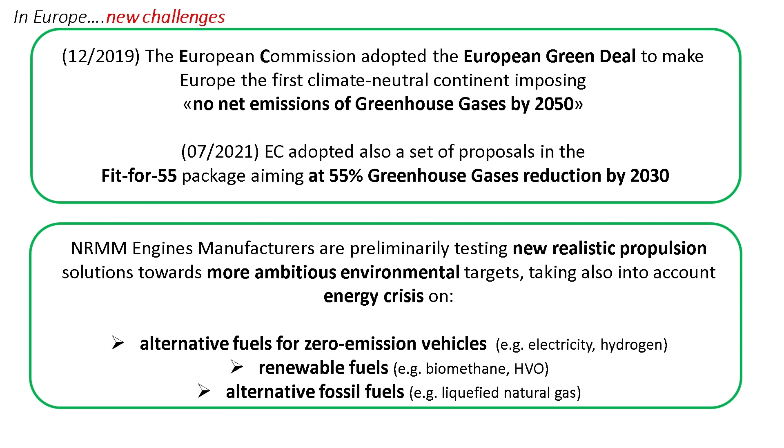I'll now give the floor to Mr. Diego Rotti for FPT, who will talk about the decarbonization process and how it's actually implemented. And then Mr. Mauro Mancuso from Kohler will take the floor and talk about a more sustainable future.

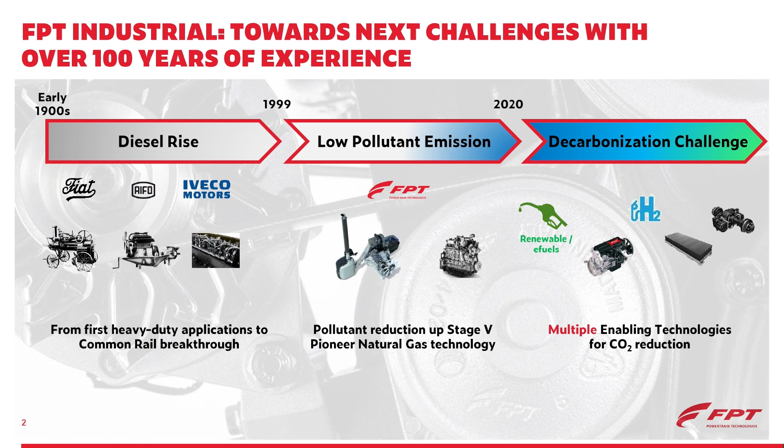Just a few words about our company. We are a company of the Iveco Group, manufacturing propulsion systems for industrial applications, about 500,000 engines a year, and over 130,000 of them are used for agricultural applications, from combines to sprayers and tractors. So we have a good client base that we have to take into account and meet their requirements.

In 100 years of history, we've always worked on the innovation of propulsion systems, motors, and more recently new technologies. This innovation and development has gone through three macro phases. The first one, in the 1900s, was the development of diesel engine technology, improving performance, electronic injection, efficiency, and many technical developments. Over the last 15 to 20 years, end of the past century, beginning of the year 2000,

we were trying to reduce polluting emissions while improving productivity, which is an inevitable requirement. But much of the technological development was aimed at reducing polluting emissions. In fact, the industry was required to gradually introduce regulations that became stricter and stricter in order to reduce pollutants. And at FPT, we introduced some pioneering solutions in terms of efficiency and post-treatment.

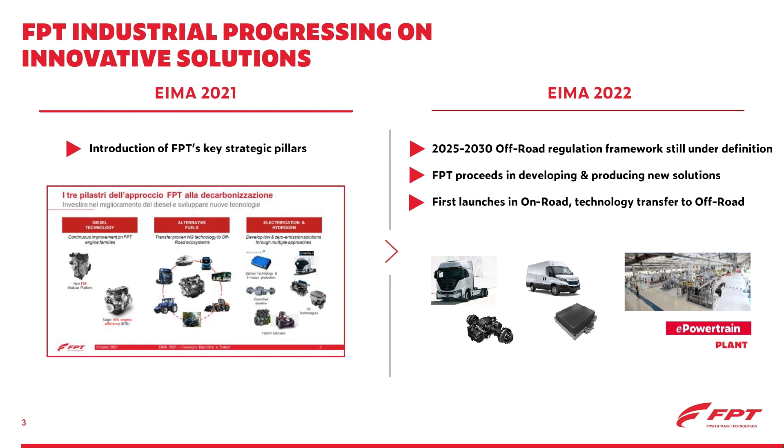We are still operating in a situation where no specific regulations are available yet about CO2 reduction, while in the automotive sector, the EU has already introduced regulations. In the off-road world, there's no legislation available yet. All current developments are aimed at improving products and making them more sustainable, but there's no framework legislation for us to make reference to.

At FPT, we've invested in the development pillars mentioned last year. We worked on prototypes for off-road vehicles and started manufacturing new solutions based on new technologies that will then be used in the off-road vehicle sector. Mid-October in Turin, we opened a new plant that will manufacture high-voltage battery packages and electrified systems.

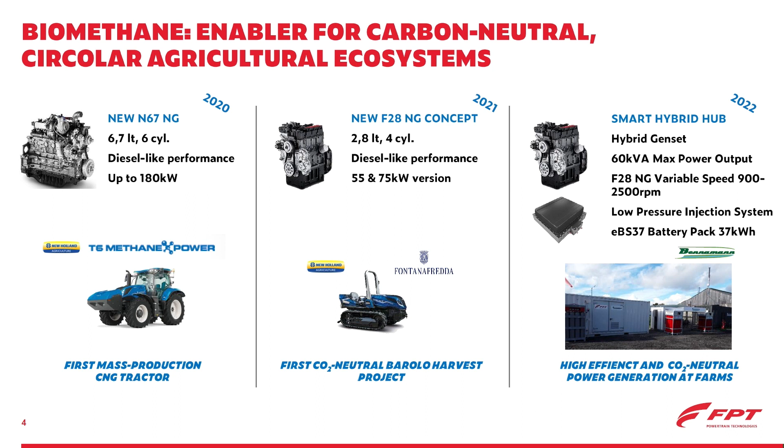The last, but not least, project in time terms is still about the use of biomethane within circular biosystems in agriculture, but for power generation. You can see this electrogen group, which is currently being tested in southern England on a farm with a partner, Bennamann, an English startup developing these biomethane ecosystems all along the whole chain, from management of agricultural waste, purification and conversion into biomethane, and then liquefaction, should it need to be transformed. This group is used to generate electricity to be used on the farm.

The feature is that we use the same engine as the vineyard tractor, gas powered, 2.8 liter. It was combined with a hybrid electrogen group connected to an electric engine with a battery, which is one of the batteries that we started manufacturing at our plant in Turin in order to store energy. The idea is we have this power generating group, and based on the requirements of the company, it can provide everything with a thermal engine, but if more power is requested, it uses what's been accumulated in the battery. So it's a hybrid concept applied to power generation in a biomethane chain. The first prototype is currently being tested on this farm in southern England.

Switching to another fuel, we have hydrogen. Hydrogen can certainly become one of the most interesting energy vectors in the future, with a number of implications due to the potential development of infrastructure. That is, of course, something that is yet to be taken into account, but it can be used in fuel cells to produce electricity, and can also be used as a fuel for engines. The advantage being that you keep the traditional vehicle architecture—of course you will need to provide a hydrogen system, but the vehicle doesn't need to be electrified, and you can keep the traditional architecture.

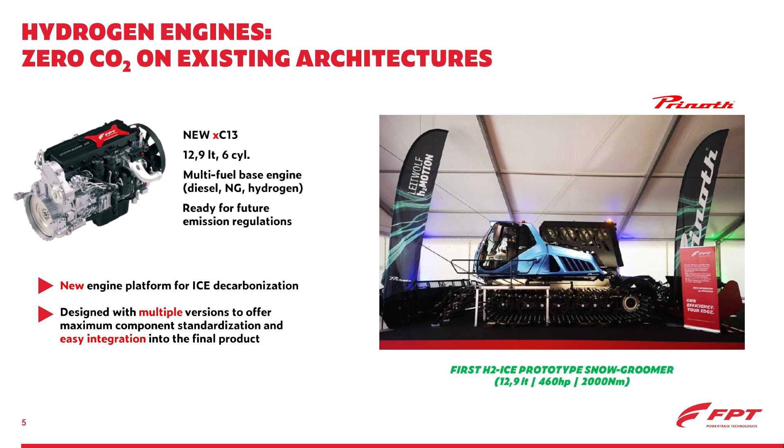We presented a new generation of industrial engines, 13-liter, high efficiency, so high fuel efficiency. Even in a diesel version, we have a 6 to 8% reduction in CO2 emissions. It will be introduced starting in 2024 for road application, and then for large agricultural machinery. Being a new engine family, it's been designed in order to be able to be operated on other fuels, including hydrogen. Hydrogen as a fuel is still being worked on.

We're working on direct hydrogen injection, which provides more efficiency and better performance, but longer development times. So we're working on a prototype, and a first prototype of a 13-liter hydrogen engine, 460 HP, has been installed on this object. This is a snowcat by Prinoth, one of the world leaders in solutions for ski resorts.

Ski resort and ski track management. The prototype was presented in September, and we are waiting for snow for the winter season in order to test it on the tracks. It's certainly a very challenging application, not the simplest one to test a new technology, but it's a good way to put it to the test in a challenging context, at least in terms of temperature.

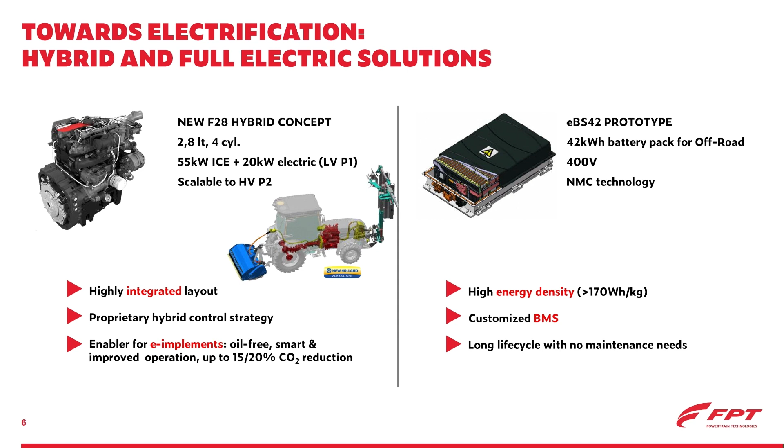And then purely electric vehicles. Here we are extending our battery solutions, already introduced and being manufactured for road applications, to off-road applications. At our stand, we have a first prototype of a high voltage lithium-ion 42 kilowatt-hour battery for off-road applications. It's been tested on a first application with one of our customers, but it's in line with our vision, i.e. introducing solutions by using technology already tested on-road, adapted to off-road vehicles in agriculture. So that's all from me. Thank you very much for your attention, and I'm here for questions if you have any.

Good morning everyone. My name is Mauro Mancuso, Senior Product Manager of Kohler Group. Kohler Group is less well known than the FPT Group, which my previous colleague represented, but we've been manufacturing engines since 1922, first under the name Kohler, and the old name was Lombardini. I'm going to present Kohler's vision for the future and the technologies that can be applied from day one.

Starting today, let me give you an overview of our short overview of our market vision, how we see the market in the future. In the near future, in a more sustainable future, we see a fragmented market, meaning we can't see a disruptive technology on the market. So we'll be experimenting with solutions where the engine and the technology will be tailor-made for the machine. Of course, the duty cycle will be important - the power, and how long the power should be made available for.

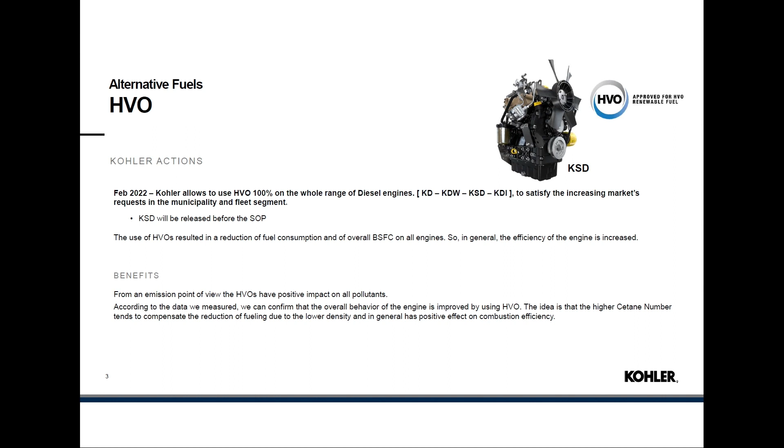What can be done starting today for a more sustainable environment and a positive impact on human health? First of all, HVO. HVO is a synthetic fuel extracted from renewable oils, which allows us to reduce engine emissions up to 90% of CO2 emissions. It's an important alternative, not a final solution, because producing HVO requires a considerable amount of energy, but still, it may contribute to reducing CO2 emissions into the environment.

My suggestion is to come and visit our booth. All our engines are certified for HVO use. And last but not least, our latest launch, the KSD engine, a small engine which we are presenting here at EIMA and we're very proud of.

HVO is not the only renewable fuel on the market. There are more coming up: GTL, gas to liquid, and BTL, biomass to liquid - special substances. We are testing engines with these renewable fuels, which do not provide a final solution, not a disruptive technology, but they are potentially useful in terms of reducing CO2 emissions.

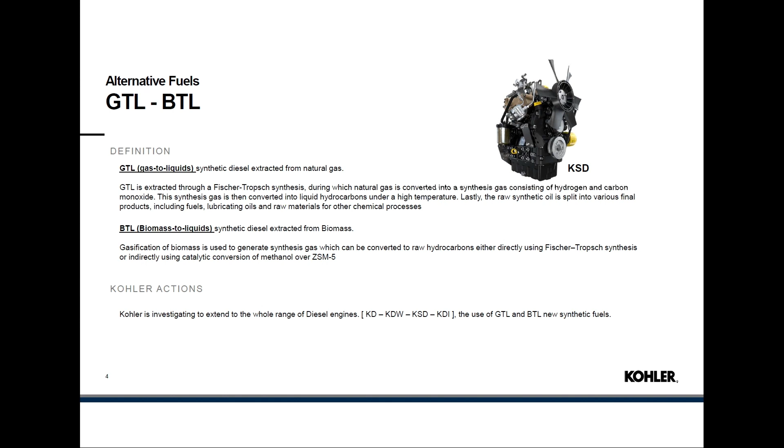Kohler is extremely focused on renewable fuels. We have joined the e-Fuel Alliance as a result of our commitment. This alliance is trying to raise awareness and promote the production of alternative fuels and renewable energy sources. Many alternative fuels have been experimented on and can certainly contribute to reducing CO2 emissions.

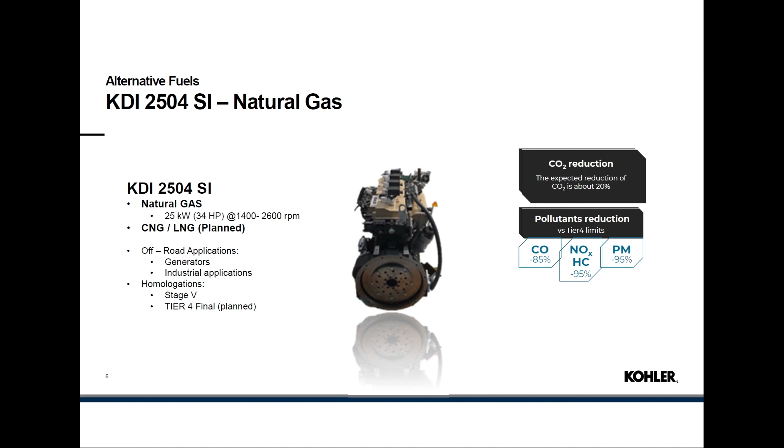What are we working on? What are our projects? Kohler is a small company, very active, with great projects in store, as we've been able to prove over the last few years with our results. We have a whole portfolio of new products, including natural gases from fossil energy sources that can be applied to cogeneration systems, earth-moving machines, and agricultural machinery. Last but not least, next year we'll be launching a gas-powered engine based on our famous KDI 2504, powered by non-compressed natural gas and compressed gas as well.

We are very committed to hybrid applications too. We launched the idea a few years ago, and we're back here at EIMA. The innovation is that we have the 48 volt as well as the 96 volt versions.

We've seen a lot of interest on the part of our customers because the hybrid solution with internal combustion engine combined with an electric machine can provide advantages with alternative cycles whenever you need torque power requirements intermittently.

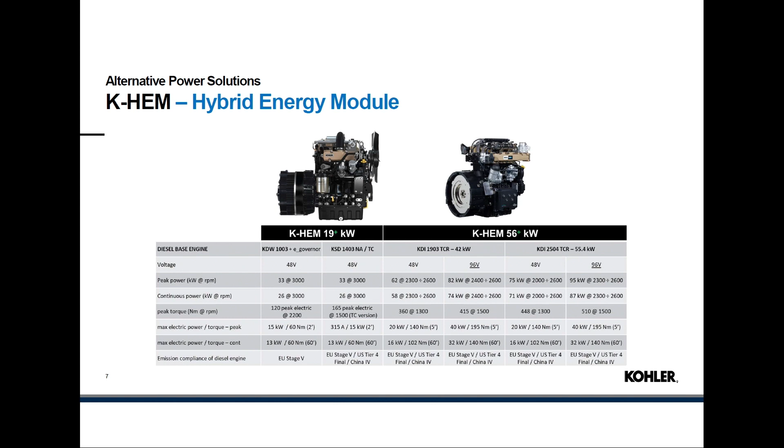We're still working on the project, aiming at higher voltage versions. We have nothing to show for the time being, but we have a very broad product portfolio coming up for the next few years.

At our booth, we're showing 2 hybrid machines. Please come visit us, and our technical staff will provide you with information and details.

And last but not least, this is my last slide, and I'll come to my conclusions. So stay tuned. Stay tuned and pay attention to Kohler.

In fact, we have a hydrogen project in store and it's coming up quite well based on our KDI last generation engine. We have high voltage for the hybrid application and also the full electric version for full electric machines.

In view of the latest acquisition by Kohler of Curtis Instruments, which of course will pave the way for us towards electrification. Thank you.

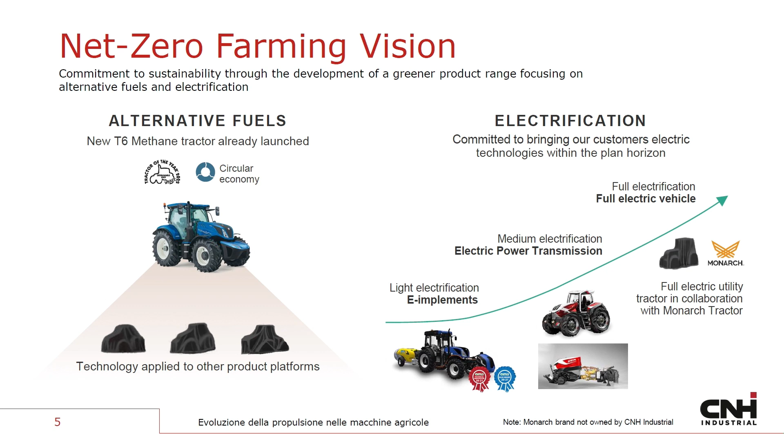How does CNH approach these themes? Well, first of all, through alternative fuels. As you know, CNH launched the natural gas tractor in 2021. This is giving rise to parallel projects linked to the vehicle and the infrastructure, which is equally important, especially in this sector. And then electrification, light electrification, electrification of implements. In EIMA 2021, we presented a lot of innovation in this respect this year as well, thanks to eSource. And then hybridization - the prototype you see is the Steyr concept presented in 2019. Last but not least, full electrification, which is basically linked to machines below 100 HP. Here we are establishing strategic partnerships in order to make developments faster. These are the ways in which we will tackle the issues that I mentioned at the beginning.

In 2020-2021, I left you with a similar slide to this one. The contents have changed a little bit, but in 2021 we had all these products presented, and then there was more to come, which is now the Steyr concept presented in 2022, and another concept which is mild hybrid in orchard and vineyard tractors.

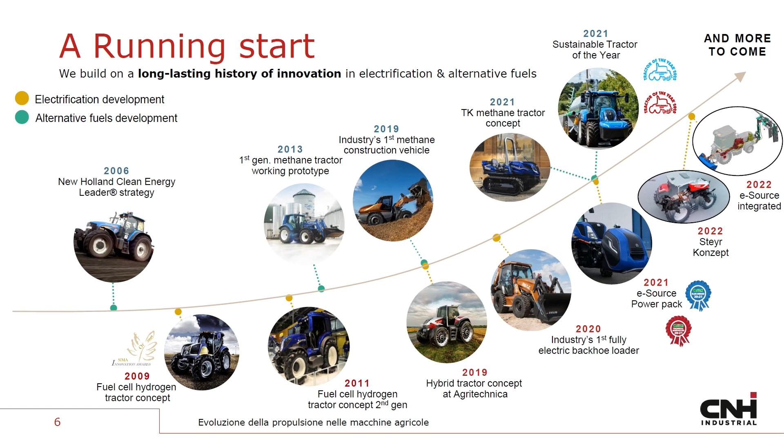There will be additional activities and developments because CNH Industrial is very active in this. Just a few examples of products that are being produced at the present time or will be produced.

Natural gas operated tractors. They've been presented on other occasions. Their main impact is on CO2. It's zero if the natural gas tractor works in a farm that produces natural gas.

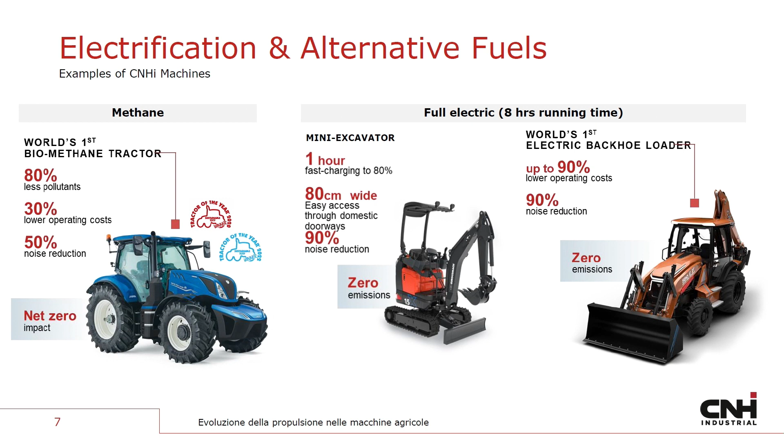And then the electric backhoe loader, which is almost ready for production and manufacturing. Apart from making prototypes, we are trying to manufacture them, to bring them to manufacturing.

eSource was presented in 2020-2021 within the electrification context. We're working with many manufacturers of implements, also those awarded this year at EIMA.

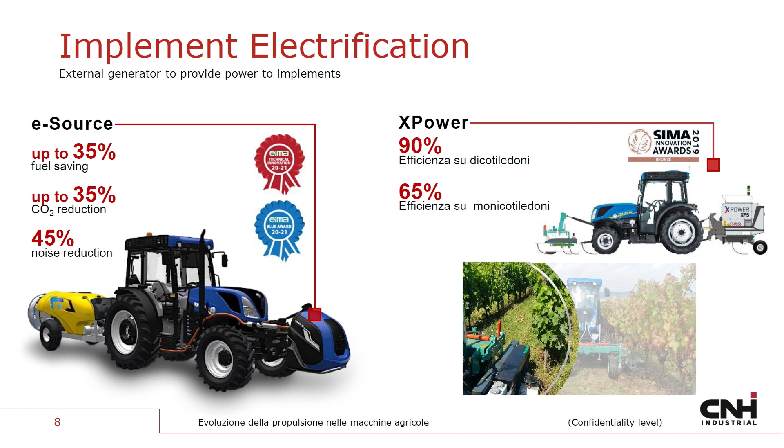X-Power is a product which is meant for electric weed killing. There is a generator set and a head that actually is responsible - it's an electric head responsible for weed killing.

And then another theme that I would like to touch upon is the development of mild hybrid solutions for orchard and vineyard tractors. You know, it's the tractor that won the best specialized of the year. It's modular. The system is modular and upgradable.

The mild hybrid system basically consists of an internal combustion engine, 55 kilowatts, F28 - I think it was presented before - with an after-treatment system developed specially for this application.

And then there is, in yellow, an electric machine in between. It has 48 volts. It's installed in P1 mode. There is not a full electric function though. The system was developed as a joint effort with FPT and New Holland. And then the inverter, the power distribution unit, which is the core of the system, and then the battery pack.

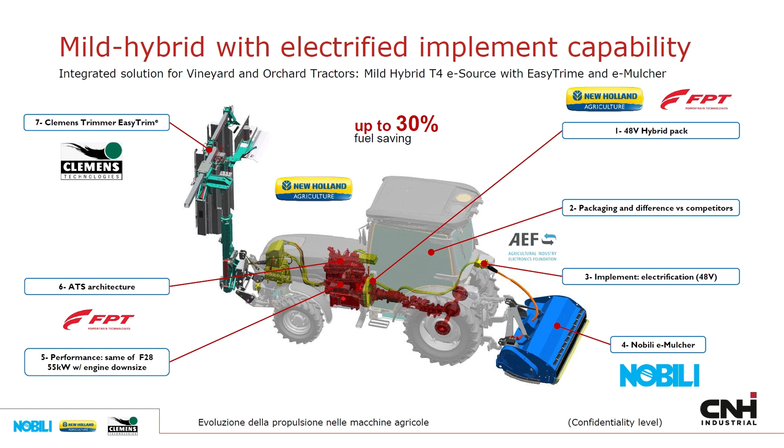This is one of the latest developments, focusing on the electrification of the system, not just the tractor but also the implement. It's a key point to provide the final customer with tangible benefits. Our decarbonization process focuses on two themes, customers and sustainability.

And here I'm coming to my conclusions. We expect to approach the urban environment also with increasingly electrified construction machinery. We will do so by developing products with strategic partnerships, not just aimed at developing vehicles, but also the infrastructure. In the case of the natural gas tractor, of course the system has to work on a farm that produces natural gas. We'll be working at this very closely.

Last but not least, it's important to provide the business, the final consumers, added value through hybrid and full electric systems, and this is all as far as I'm concerned.

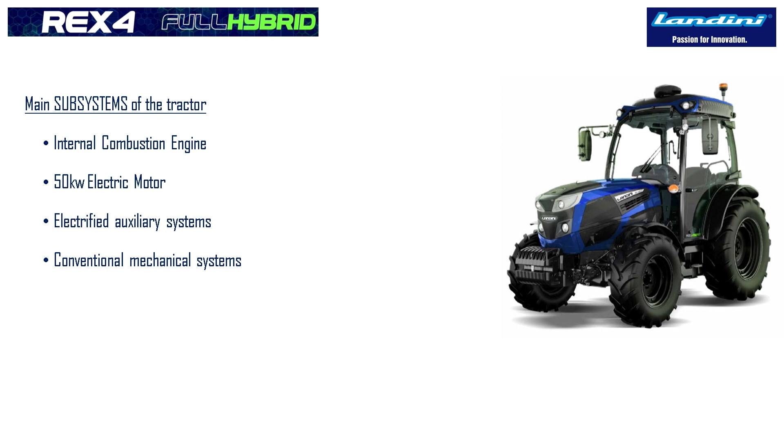This is a prototype that is working already. It is full hybrid. It's got an internal combustion engine and an electric motor which works on certain occasions with the internal combustion engine. Sometimes it works on its own. To do this, we had to electrify auxiliary systems and components which used to be mechanical in the past.

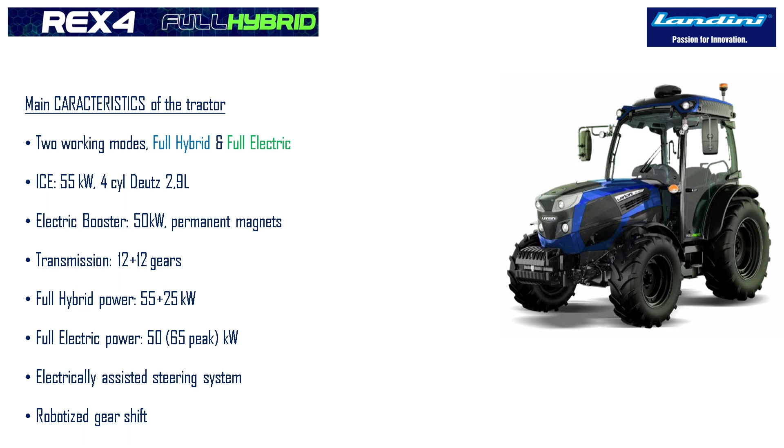Now, some details of the tractor. This tractor, as I said, is a full hybrid. It's got a 55 kilowatt internal combustion engine. Below 55 kilowatts, we can manufacture, or we can use simpler engines that don't use urea to reduce exhaust gases, and yet they are compliant with stage 5 regulations, which are currently applicable.

So we have a compact internal combustion engine, but we also have the possibility to add electrification. When the tractor works in full hybrid mode, the 55 kilowatt internal combustion engine works with the electric motor that has a maximum output of 25 kilowatts. This is a 110 HP tractor, and by so doing it is completely exploited, completely used.

In this way, as our colleague showed before, we can reduce emissions. We can also reach a situation where the internal combustion engine responds if increased torque or power are required, so the ICE reacts in a certain way.

The electric motor that we use has permanent magnets. It also acts very quickly, so it can help the internal combustion engine dynamics. If you combine the torque of the electric and internal combustion engine, you can obtain very clear benefits in terms of driving the tractor. The driver has the impression that the tractor is much more powerful thanks to this combination.